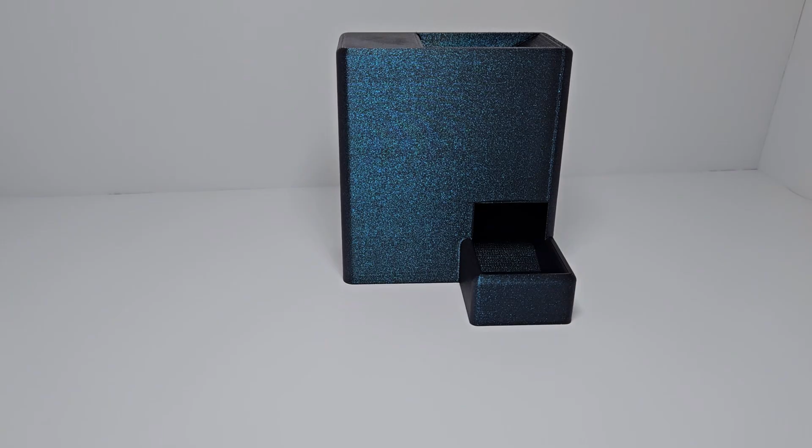One man, one dream, to control the roll. Coming to a theater near you, the most convoluted, complicated, and dastardly dice tower you'll ever... Oh, well, that looks rather nice and minimalistic. Yeah, let's learn that instead. Buckle up, ladies and gentlemen, for a thrilling tutorial.

So let's get on to making our super cool little tiny dice tower. The first thing you're going to want to do, as always, is just save your project. We'll just call it Dice Tower.

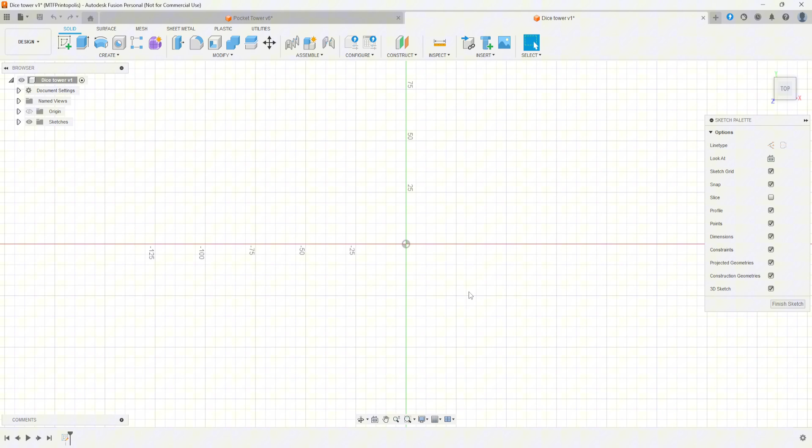And we're just going to start out with a box. So we'll go up to our sketch, and start it on the bottom since we're going to extrude up. We'll go to Create Rectangle, Center Rectangle, and make this 90. Hit tab to go to the next axis, by 45. Finish sketch.

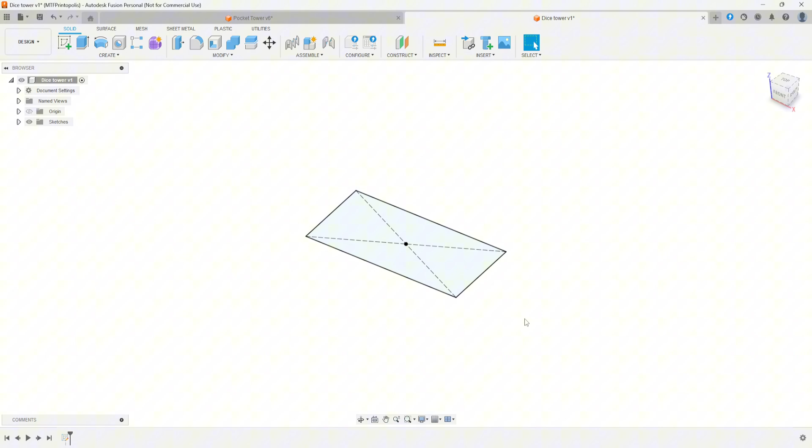Next, we're going to extrude up, because it's just going to essentially be a box that we're punching holes in. This can be as tall as you want it to be, but generally these dimensions I found work for as small as it can be. So you just want to extrude up 100.

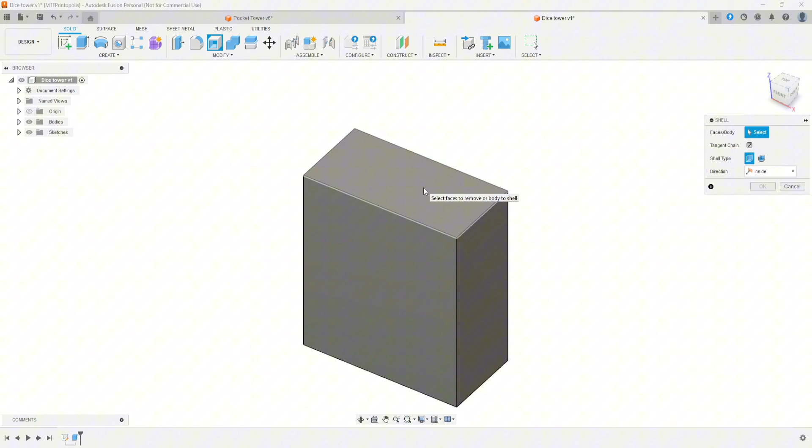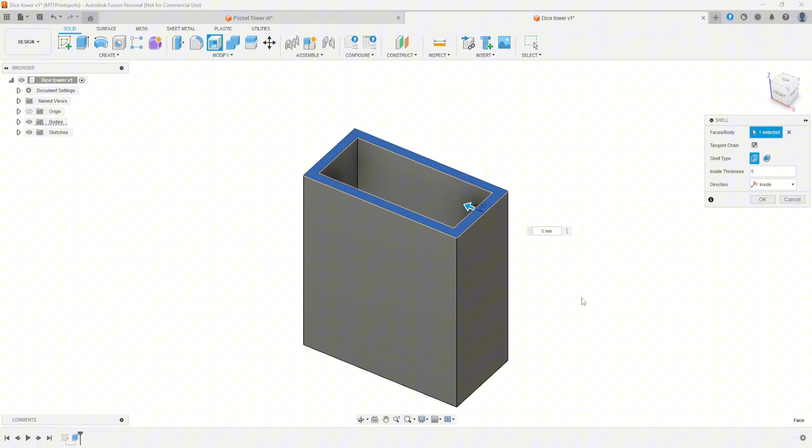Next, you want to go over to Modify, and just above it, you should see Shell. If not, it should be down in the drop-down menu. What that's going to do is take any solid, completely closed-in object and create a hole. Your inside thickness is going to be all of the walls around that hole, and then your floor. So we're going to set that to 5 millimeters, because I found when I 3D print, 5 millimeters gives it good sturdy walls. That's going to do everything from the walls to the floor, and it's going to create no top. Just press OK.

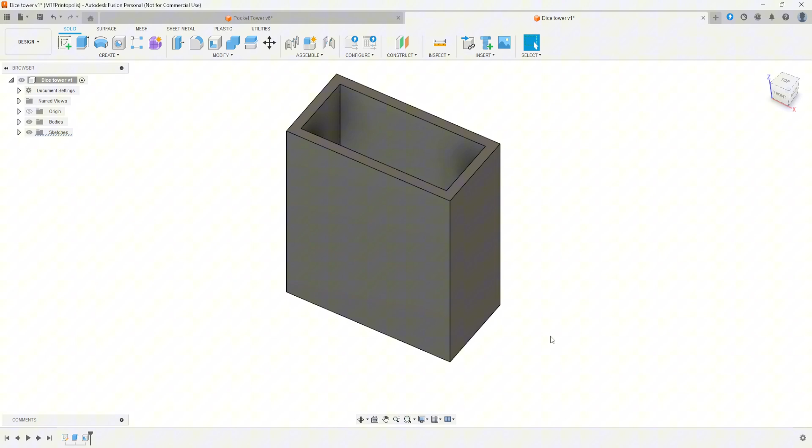All right, now that we have our shell done, we're going to do the really tricky part, which is creating the sketch for the ramps on the inside of the dice tower. If you can't get it the first time, don't worry about it, it's just going to be a lot of trial and error, and after that should be fine. I'll tell you everything that I tried and what ended up working out for me, and hopefully you have an easier time of it.

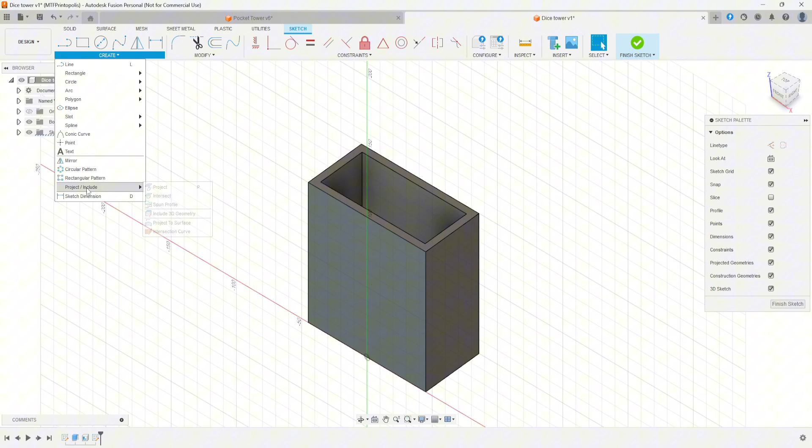So first you want to go to Create Sketch, and we're going to select the wall. Before we do anything, we are going to project the corners and floor. You want to go to Create, Project, Project. Select the floor, and select these walls. Press OK.

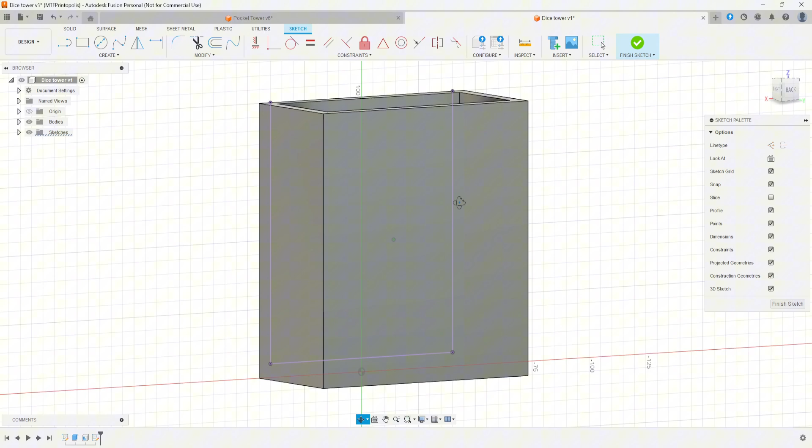Make sure you're looking dead on front. You can do that by pressing the front on your cube, or at the back if you decided to place your sketch on the back, but I did it on the front. You're just going to start placing 2 lines. One line is going to be up here at the top. You want to make sure to hit the corner of your wall and come down.

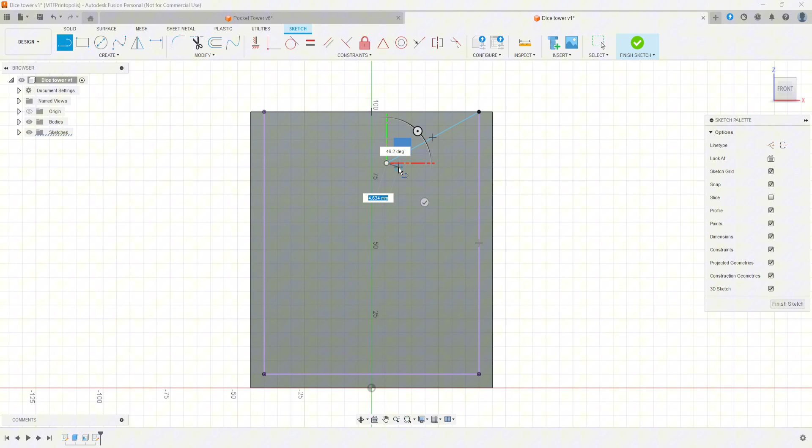What I found is for your degrees, you can just click wherever you want, because we'll edit the length of this line. So press D for dimension, click on your line and click on the top here, and that's going to give you your degree angle from this top line. You want that to be 30 degrees.

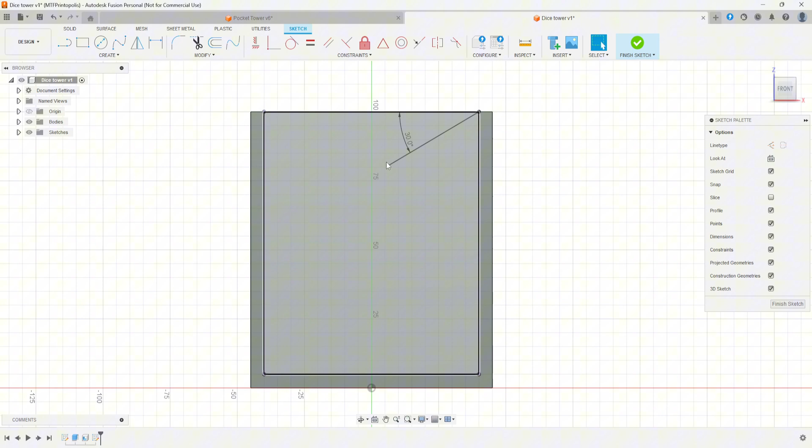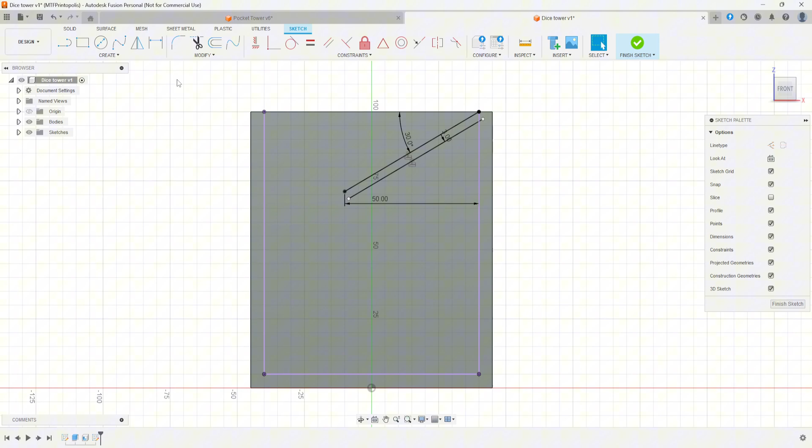Next, you want to create a dimension from this point to this wall, and we'll make that 50. We'll go to offset so that way you don't have to draw another line and just hope that it works out, and we'll offset this by -3, creating a bar. Then you just create a line connecting these 2 points at a right angle, preferably.

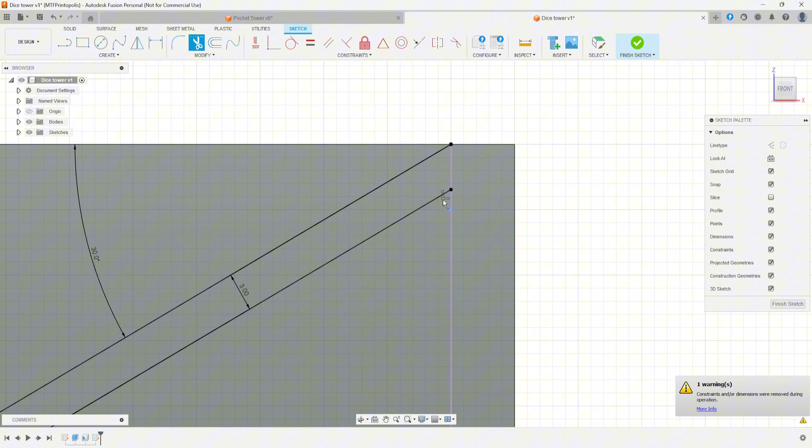Now you'll notice when you do the offset, you'll come out with this extra little nubby leg. You can get rid of that if you want, or you can keep it, I don't see it harming anything. I'm just going to get rid of it so it all looks nice. It'll say constraints or dimensions were removed, it didn't do anything, it's perfectly fine.

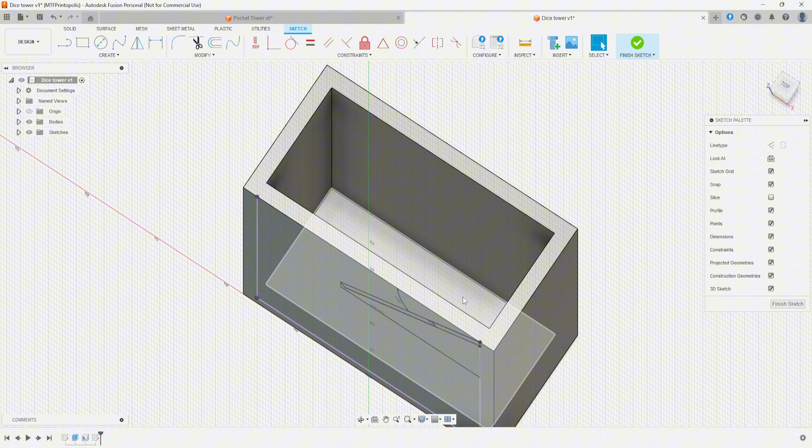All right, after we do our first ramp, what we're going to want to do is cover up some of this top, unless you want it to be a completely open top, that's completely okay. This is your project, make your tower however you want. I didn't want you to be able to see all the way down because, I don't know, that kind of ruins some of the magic of a dice tower to me.

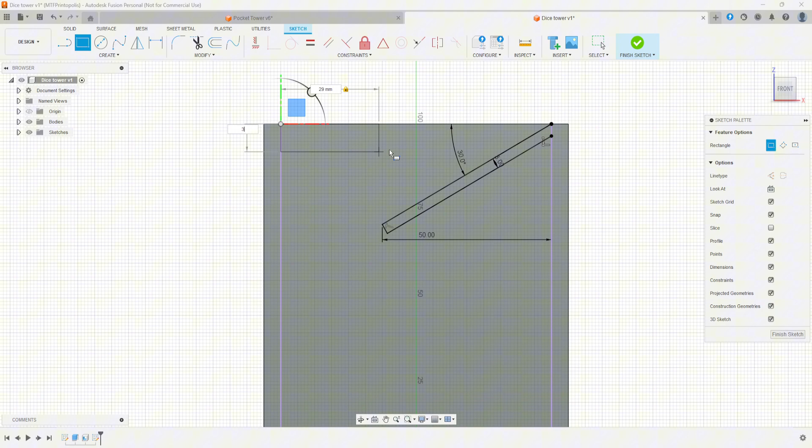So what we want to do is go back to our front, and we're just going to draw a box. Go up to 2-point rectangle, start at your corner, and it should be somewhere around 29 millimeters out, and just 3 millimeters in height, I suppose. Press enter. What we're going to do after we get everything drawn out is we're just going to push this all against the wall and it'll cover it up. You'll see in a minute.

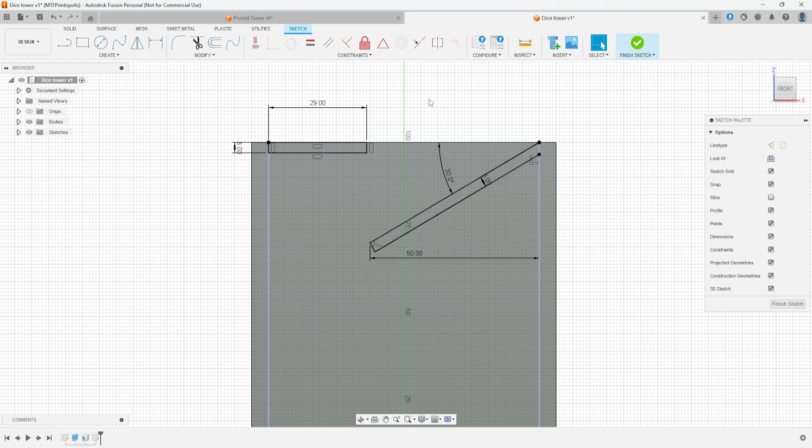So you may be wondering, well, how can I ensure that a dice will actually go down and not get caught on anything? I had a really hard time figuring that out too, but sometimes the simplest answer is the one that's the best. Measure your dice - if it's 20 millimeters, 30 millimeters, whatever it is, you just need to measure it so you know what you're working with. Most of my dice are about 22 millimeters, so what I did was I created a little circle, and let's make it about 22 millimeters.

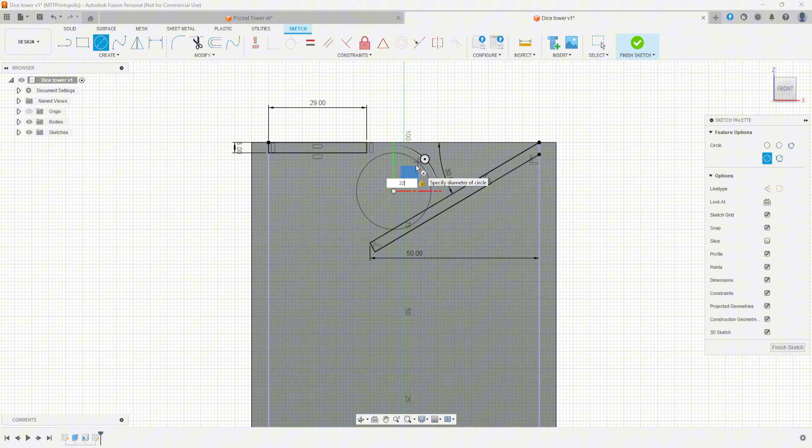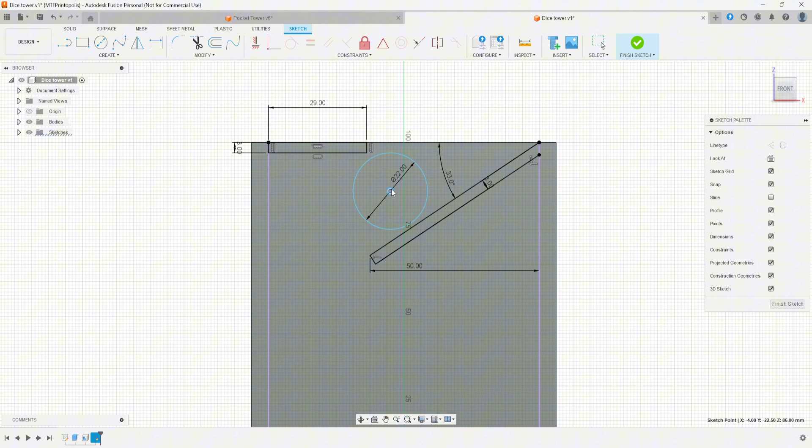After you create your test circle, you can see exactly how it's going to fit in between, and you just want a little bit of an air pocket. This seems a little bit tight, so we'll make that 33 degrees, and it'll come right back down. It'll be perfect, so our dice will just go right on down, nothing will hurt it. We can actually probably just make that 31, give it a little bit more tightness to it.

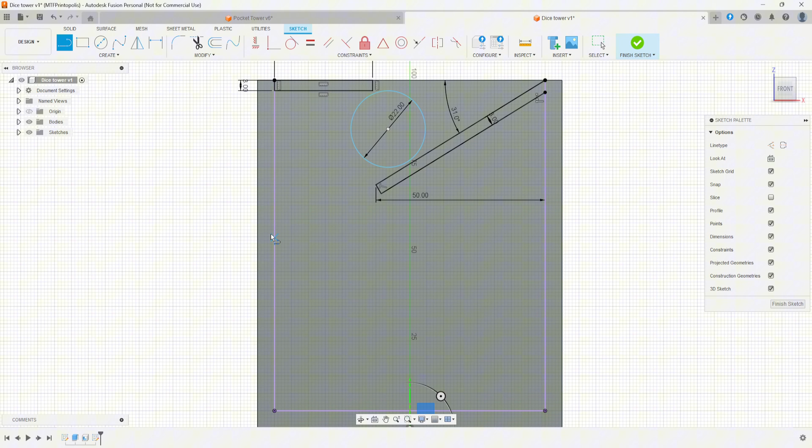Yeah, that's great. Next, we want to make our second slope, and you pretty much will just have to trial and error this to see where it's going to fall and what degrees you want to use, but you can try to follow along with this and it will work out. So you're going to create your line, just drag it out for now. We'll resize it, press D for dimension.

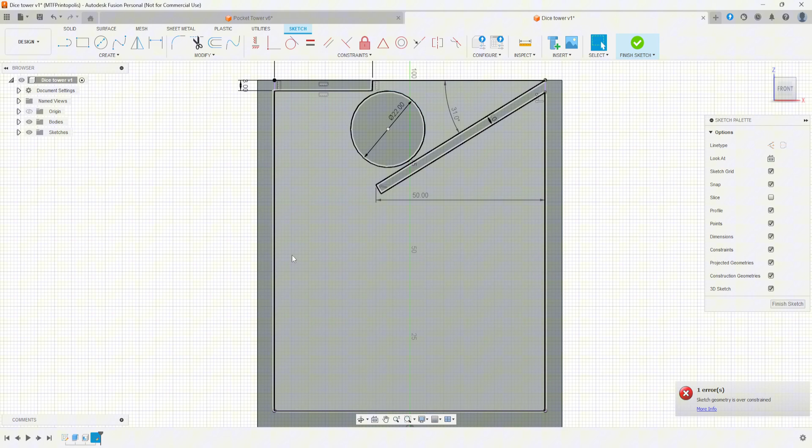This point, the top of your top lid, I suppose you can call it. Oh, and we accidentally made it on the midplane. Don't do that. So let's create another line, you can press L for line, escape to get out of your line.

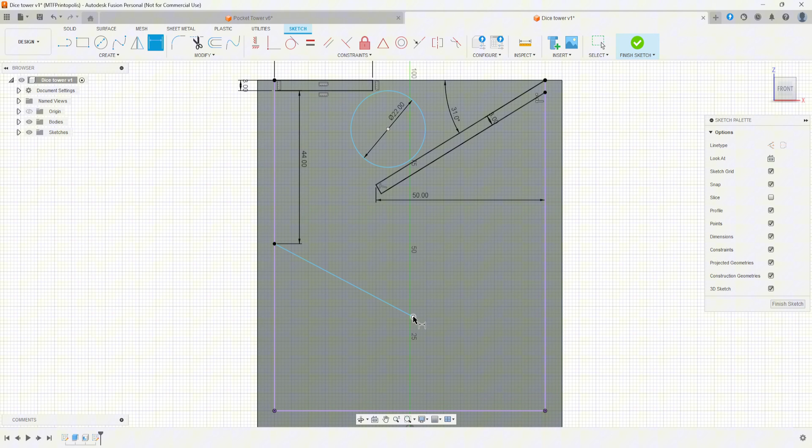D for dimension. Point, top, and we'll make that about 44 millimeters. We want to dimension this point from this wall at 50 millimeters. We want to again go to offset and create a 3 millimeter offset.

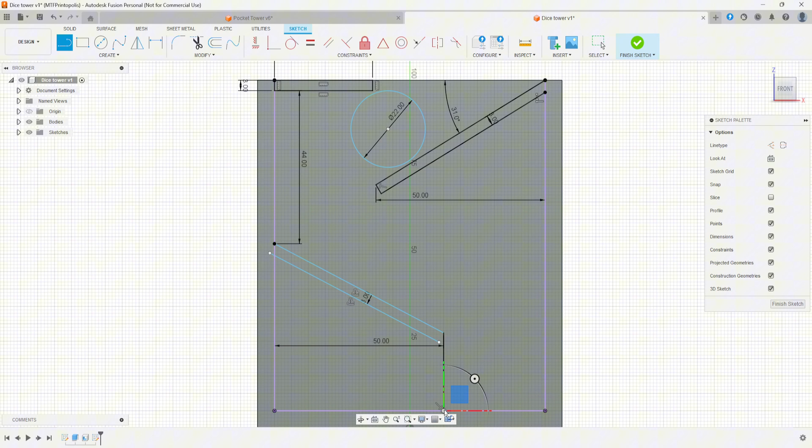But instead of joining these two lines together, what we're going to do is drag them straight down. And then just to give it a little bit of extra room, we're going to dimension and make that wall 3 millimeters. Take your trim tool and just cut off that little leg if you want.

And then drag out your circle of truth. Make sure everything fits, and it fits beautifully.

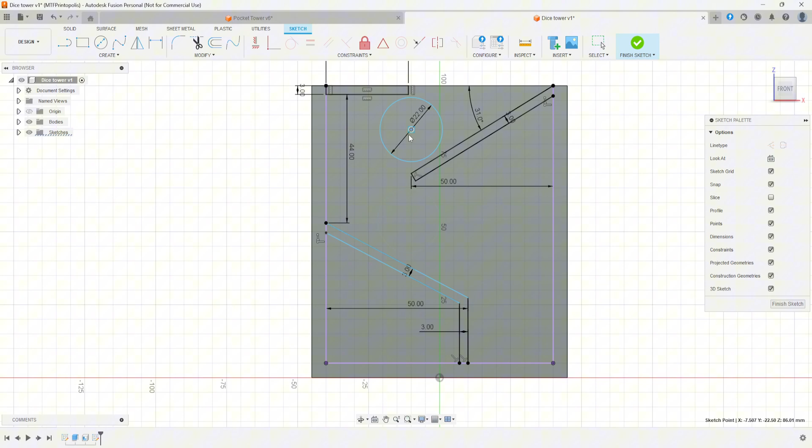So now that we have our ramps completely made, what we're going to need to do is make a little window for the dice to pop out of at the bottom. So it's going to come down, down, and it's going to land here and come out of the bottom. So all we have to do is just make two little lines. Hit, hit.

You just go up from this point and over. And then you just dimension the top, and it will be a good height is somewhere around 30 to 35 millimeters. If you have like regular, I think they're called Chessex dice, that's what I used, and I also have a little bit bigger dice, and that also worked out, but I kind of split it even. I just went 32.5, or if you're working in 0.2 millimeter increments, you can also go 32.4.

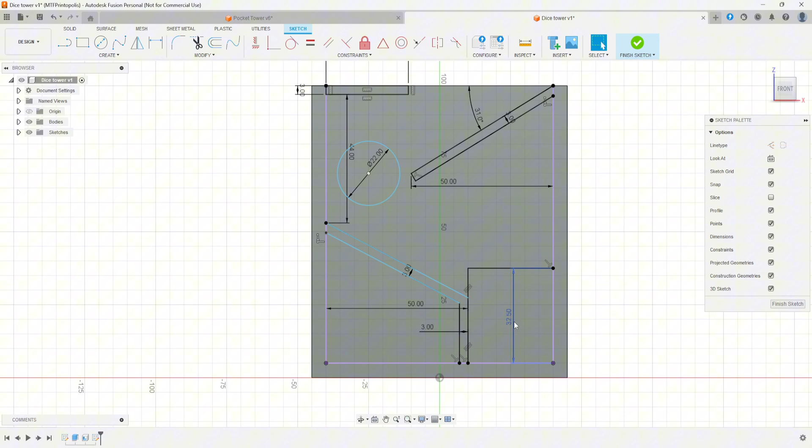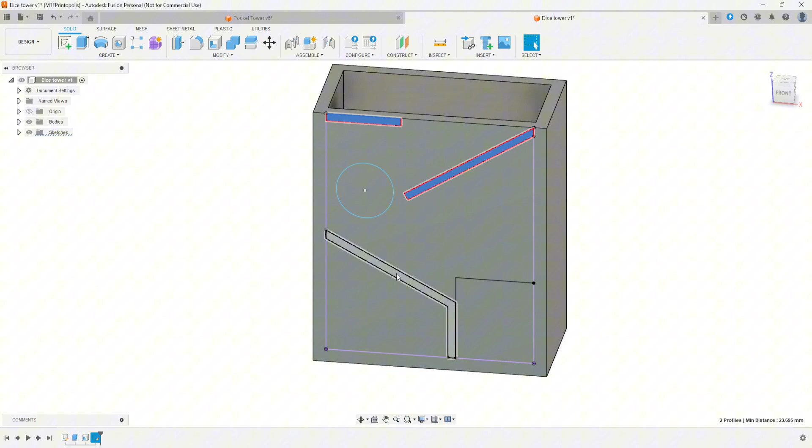Good for 3D printing. Now that we have all of our sketches completely done, what we're going to do is extrude them into the opposite wall. So highlight only your plank looking ones, don't highlight your box or your circle. Plank, plank, this plank, sure, why not. Press E for extrude, and then for extent type, go to object.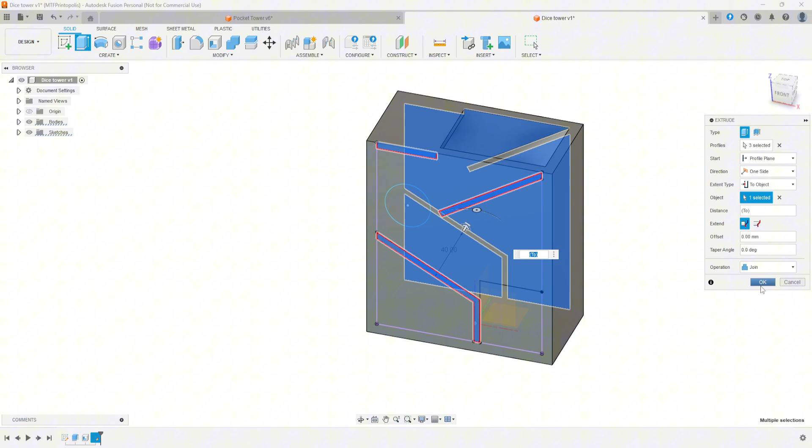Select your back wall, change this to join. And now you can only kind of see it, but you've created two ramps and a little top lidded bridge area. We're pretty much almost done with the actual dice towery part of it.

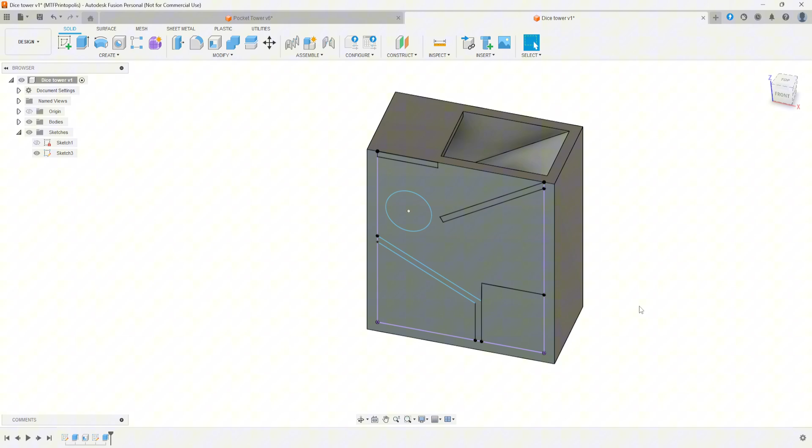So next you want to make sure that your sketch is still visible for your actual drawings of your ramps, because we want this box. And again, we want to highlight our box, extrude, go to extent type, to object, and just select your back wall up here and make sure it is on cut.

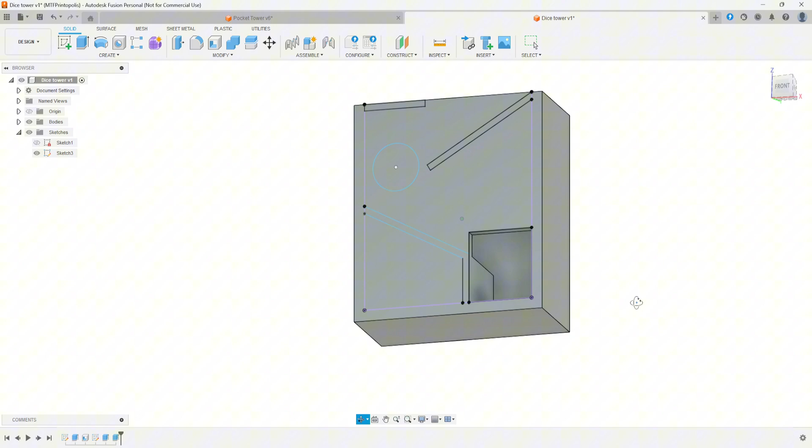And there you go. Now your dice will fall down, but then this is flat, it's not going to fall down onto that. So we have to make sure that's at a slight ramp.

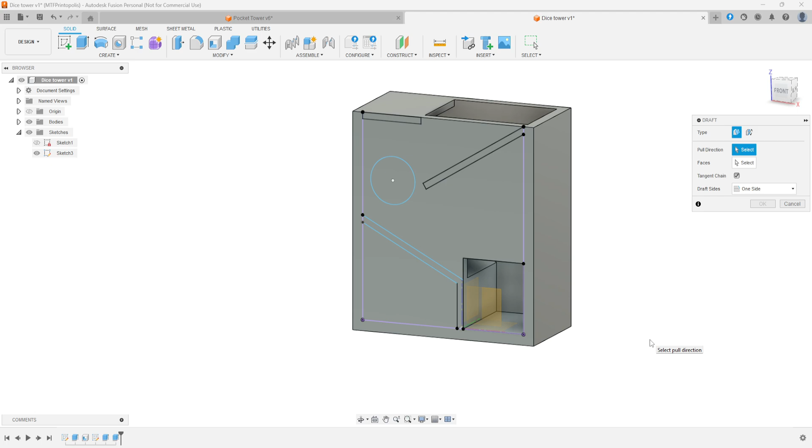So let's do that. Now you're maybe thinking you can use a chamfer on the corner and bring it up, but that won't look very great. Instead, what you should do is use a tool called draft. So go to modify, draft. This is a really confusing tool where it's going to angle one face based off of another face, and I can never remember what faces do what. So the only reason I'm going to know this is because I have the Pocket Tower pulled up on the second screen. What we're going to do is select our front face as our pull direction.

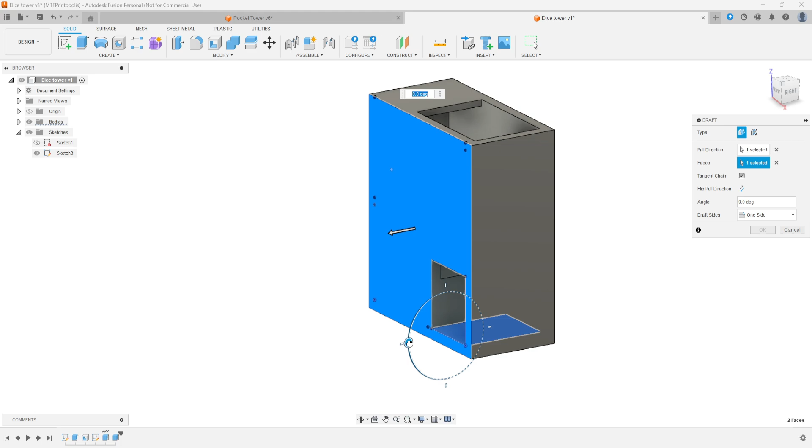And then the actual face we want to edit is our faces section. You'll see a nice little circular radius come up. As you move it, you got a draft, and you can put it wherever you're happy. I found best for me was 15 degrees. Just press OK, and you can see now it's slightly sloped. That's what we want. We don't want a super harsh slope.

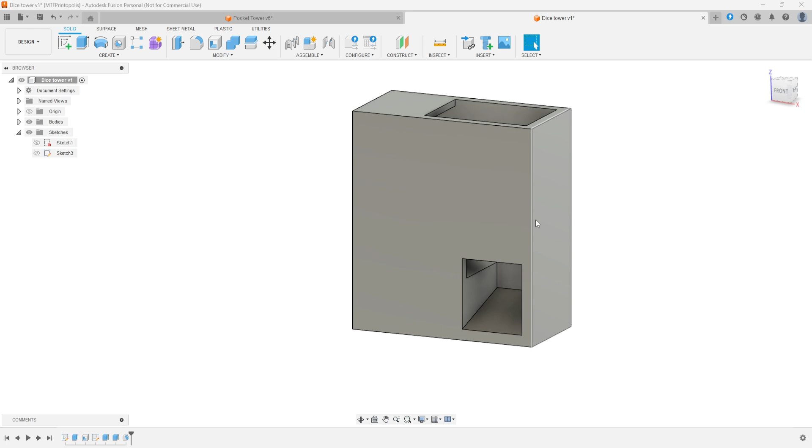Now let's make sure that our sketch 3 is invisible, because we're going to create another sketch on this face, just so you can keep your sketches organized. This is going to be for the slot that comes out.

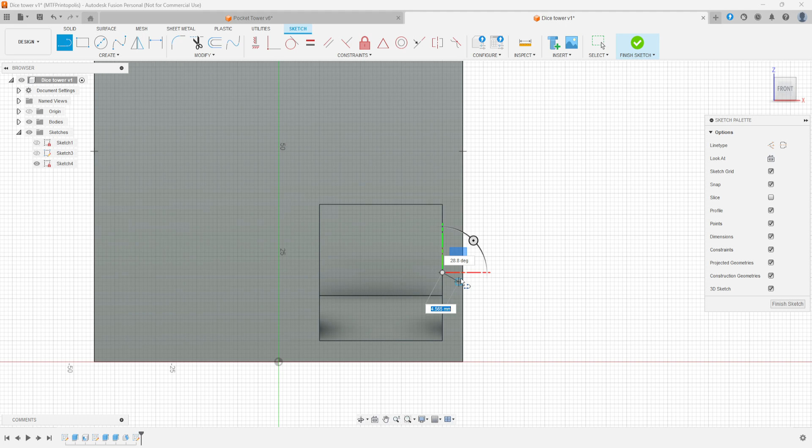So what we're going to do is create a sketch, select our face. We're going to create some lines and just find the midpoint in this box. You'll recognize the midpoint based on that triangle that pops up. Just draw it all the way across. For this side, because there's no siding to it, we're going to have to create our own. So again, find your midpoint, just go out 5 millimeters so it's uniform, because the other side is also 5 millimeters. Just drag it straight down, press enter.

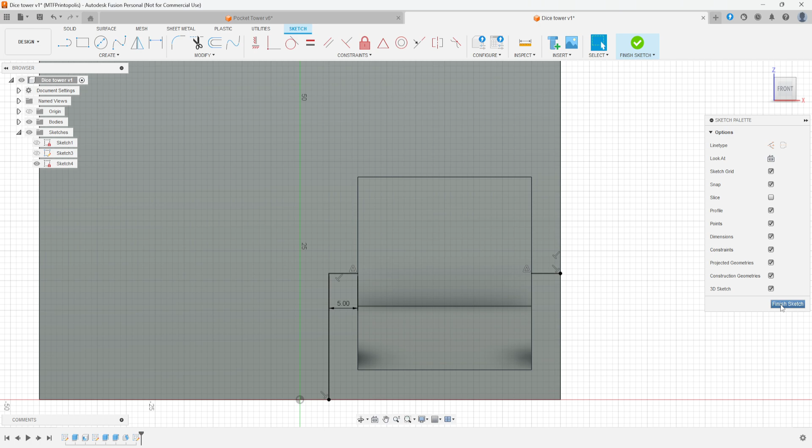Finish our sketch, and we kind of have this U shape, so we're just going to select that. We're going to extrude, bring it out 35 millimeters, again to compensate for whatever size your dice is. 35 millimeters just seemed to work out good for me.

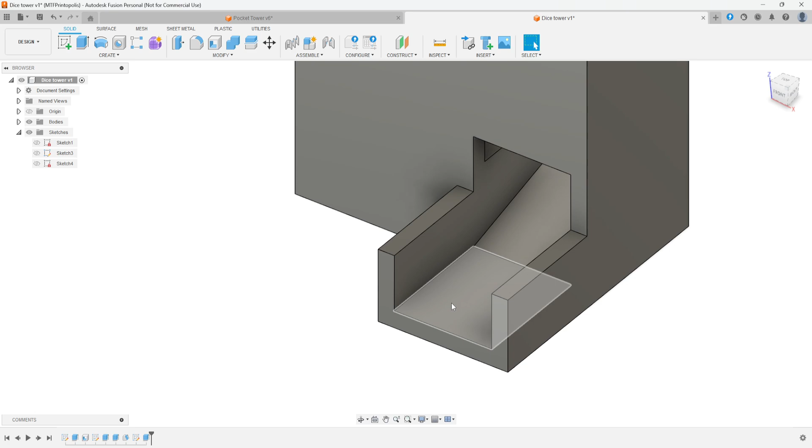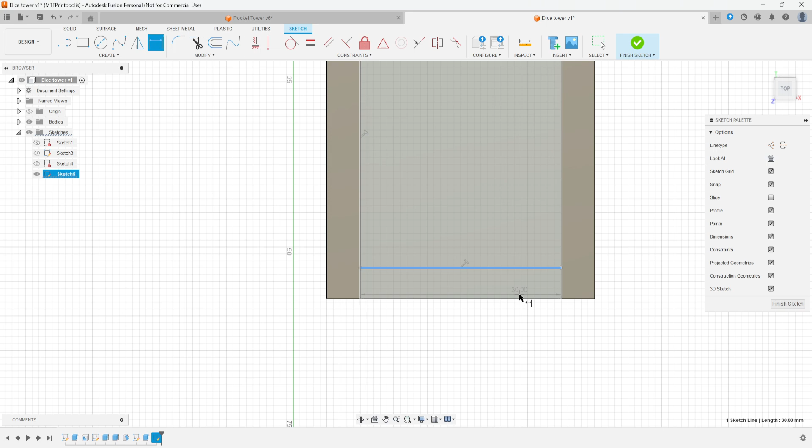Hit enter, and now we have a little chute, and we're going to seal that chute up. To do that, we're going to create a sketch on the top face of our little chute. Since our walls are 5 millimeters and our floor is 5 millimeters, we might as well just make this wall also 5 millimeters. Create a line, go from wall to wall, D for dimension, 5 millimeters.

Now we just have to bring it up. Select our little bar face, E to extrude, extent type to object, select the top of one of your walls, make sure it's in join, and there we go.

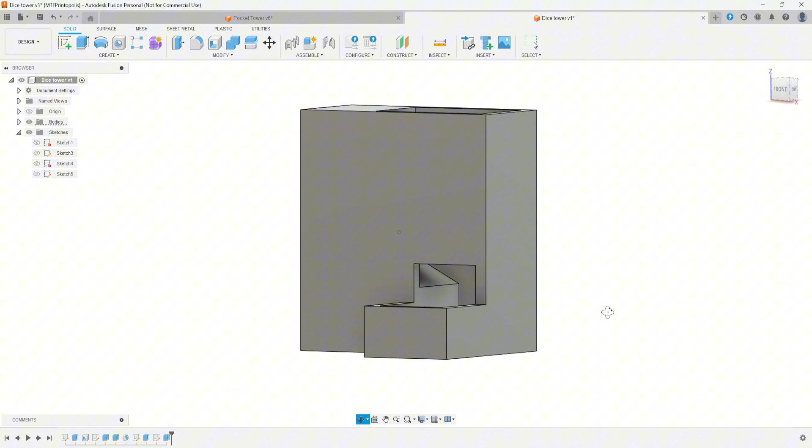We're looking pretty good. Now everything's just a little bit rough around the edges, but the actual dice tower is done. You can print this out like this and it'll probably work, although there is one little chamfer you might want to do there, and we'll get to that right now, actually. Hey, what do you know? I was right, we get to it right now.

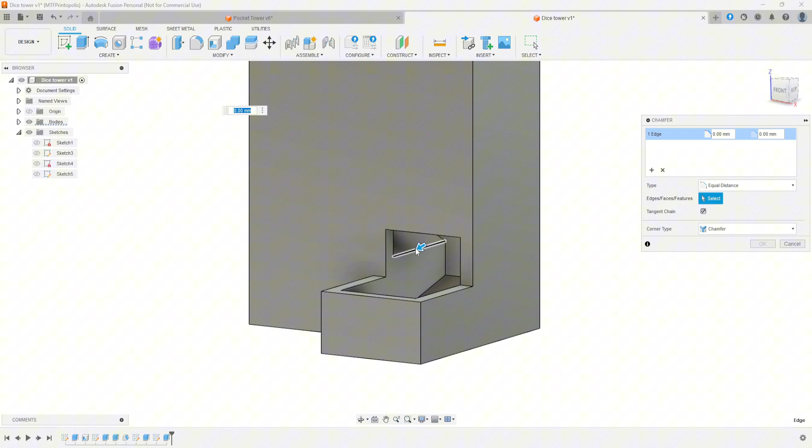So what you're going to do is select this corner right here, this edge. You're going to go to Modify, Chamfer. We're just going to bring this in a little bit, just so it doesn't have such a harsh drop-off, so that way it doesn't get stuck. I found 5 millimeters is good, so it's not clipping out of anything and it looks good. Then you just press OK.

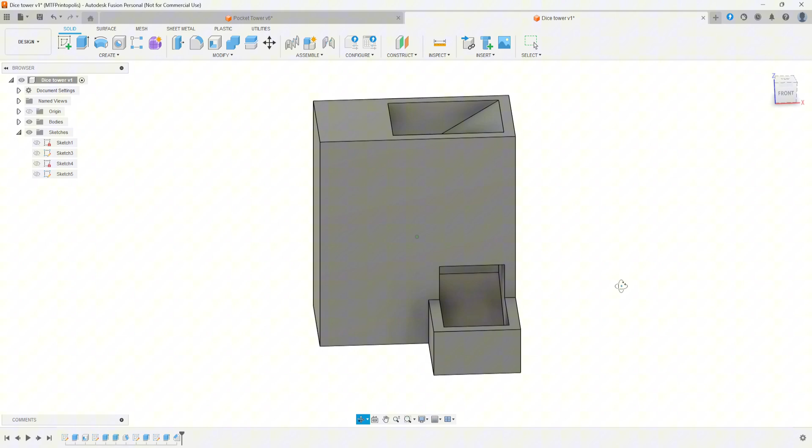And now you really can just print this dice tower out and it'll be perfectly fine. But you know, we don't want sharp edges. We want it to look good and fancy and modern and minimalist. So we're going to round a bunch of stuff out. What we're going to do is select all of our outside faces, all 4 corners of the actual vertical box, and then all of our faces for the chute. And you're going to go to fillet.

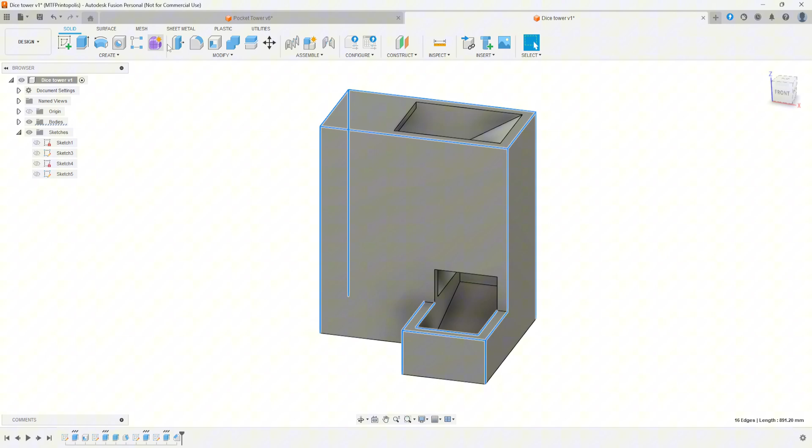All right, so I had to redo that a little bit. Here's all of your dimensioning for your fillet. You want to select all of your edges for your chute. That's going to be 3 millimeters. Make sure it looks right.

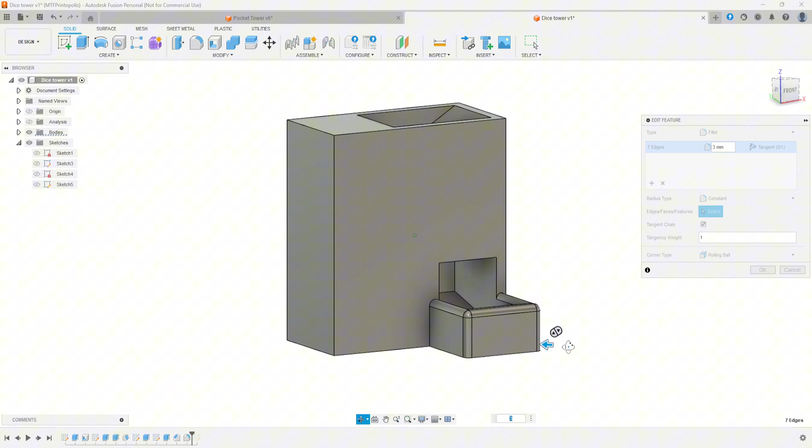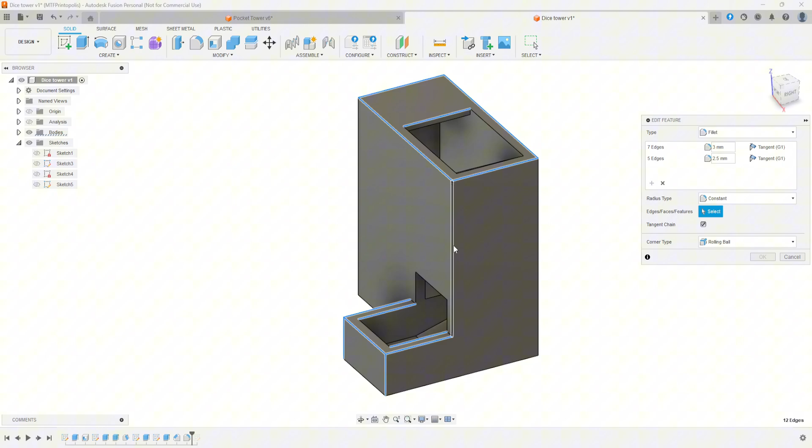You want to select all of your top edges. Those are going to be 2.5 millimeters, just so that the top bridge area here can actually fillet. And then finally, you want to select your 4 wall edges. Those are going to be 5 millimeters.

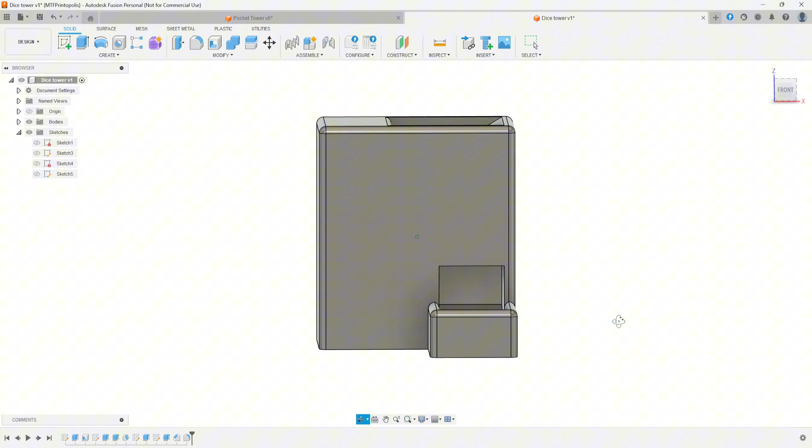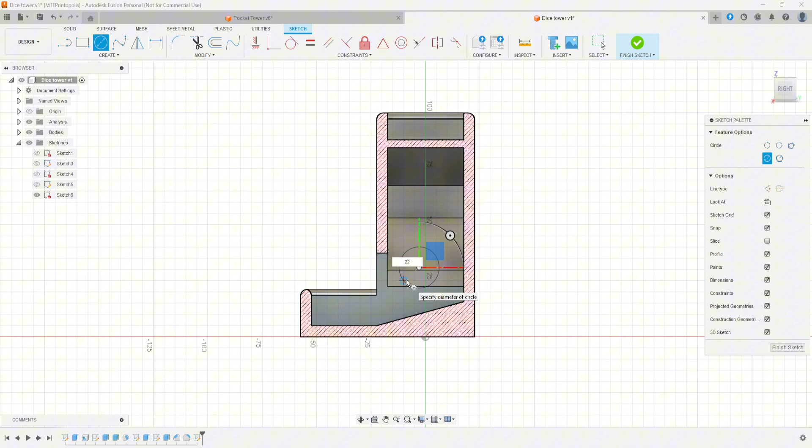And there you go, your dice tower is completely done. Now, if you are worried about the inner box here fitting, you can go to Inspect, Section Analysis, select your side, pull it in a bit. If you want to check your ramp, just go to the right, create a sketch on this wall, and you can use the circle method yet again. And as you can see, it passes through with absolutely no issues.

If you want to hide your section analysis, and I learned this recently, you can just come up here to the little eyeball, and you can just let it go. And your dice tower is back.

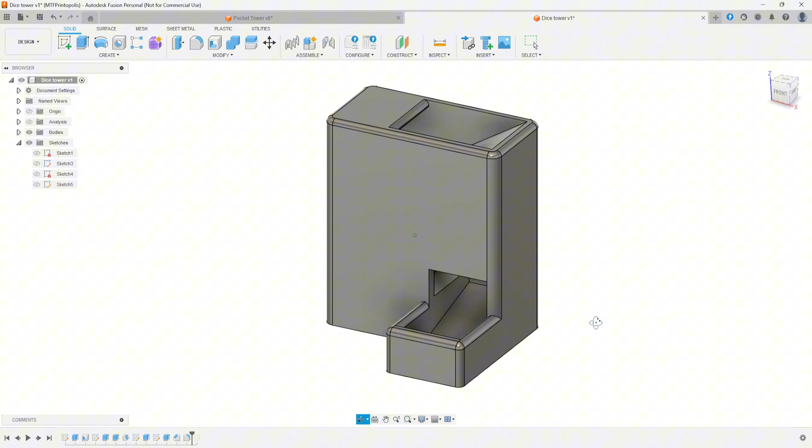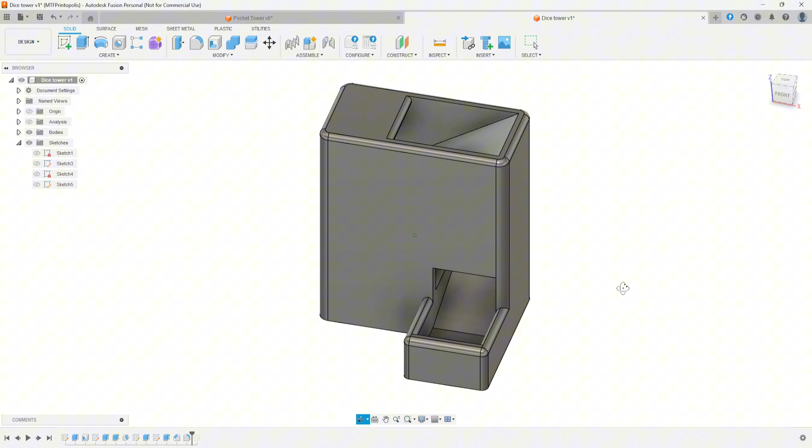Again, this is going to be completely print in place. It's going to just come right up, and all of your overhangs, such as these ramps, are just going to bridge between the two walls. You have nothing to worry about. It's going to sag slightly at the bottom, but you are never going to see it. You can't see the bottom of these ramps. That's why we created this wall. It's going to look absolutely beautiful. And of course, don't forget to save your project.

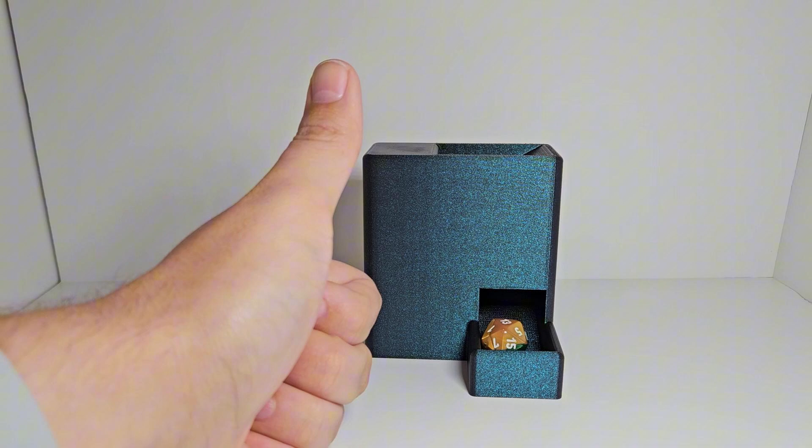And just like that, you have one super sleek, super minimalistic, really great aesthetic dice tower that I love. I had a really good time making it. It was a whole lot of fun, and I learned a lot of things, like the circle trick.